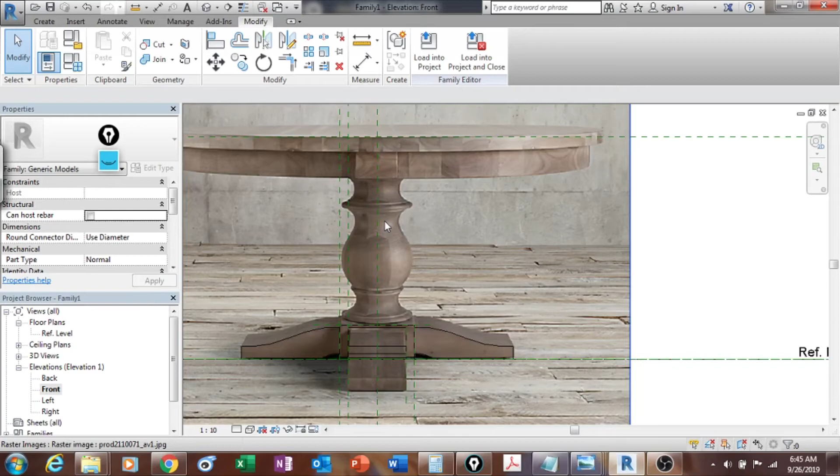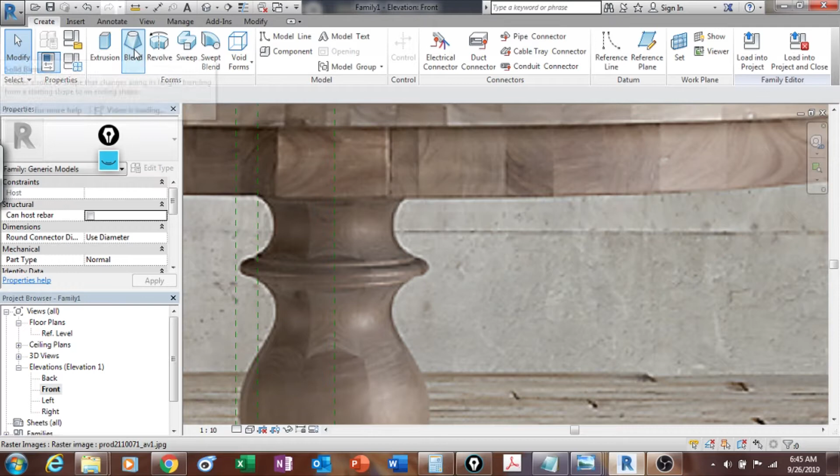Again, I'm not going to be very particular. I just want to get the shape. I'm going to go here to create. Extrusion is right here. Then I have a blend, and we talk about that in another tutorial, another example. And then you have a revolve right here.

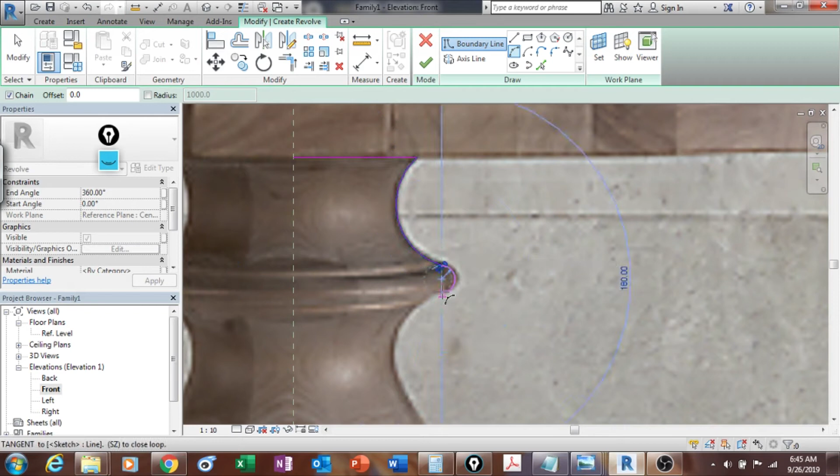Once you hit revolve, the first thing you need to do is define the boundaries right here. You see blue? Okay. So once you do that, again, you have your toolbox and you can start working. I'm going to start with a line right here, go all the way up to here, and change that into an arc. Another arc, another arc. Another arc.

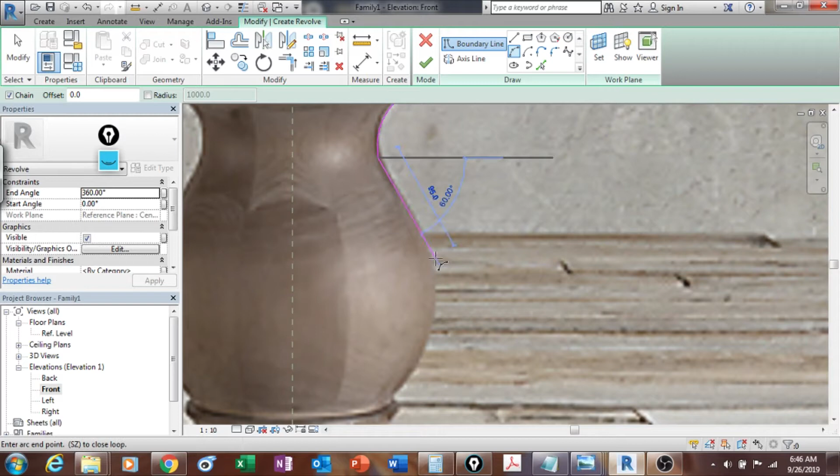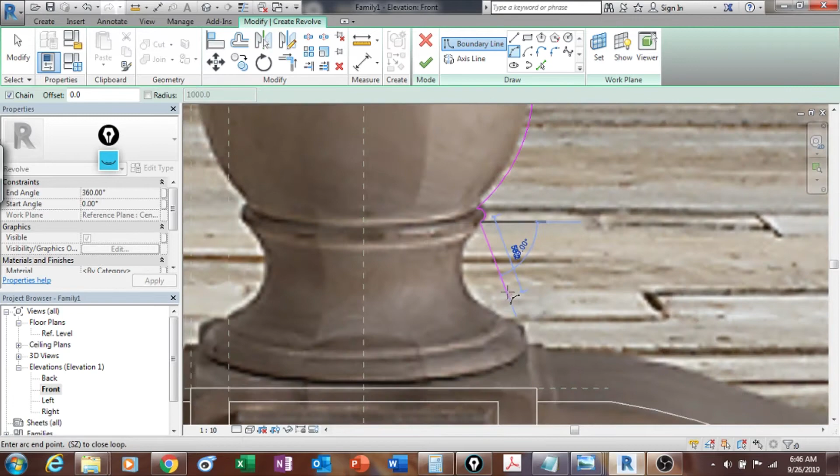I think that's gonna take this. It's probably not gonna be very nice, but anyway, it's okay. That, and I'm gonna make sure I finish right here. So as you can see, we're gonna have to do some editing in here, right? I'll make sure. Then I'll switch lines, make sure I close in here, and make sure I close in here.

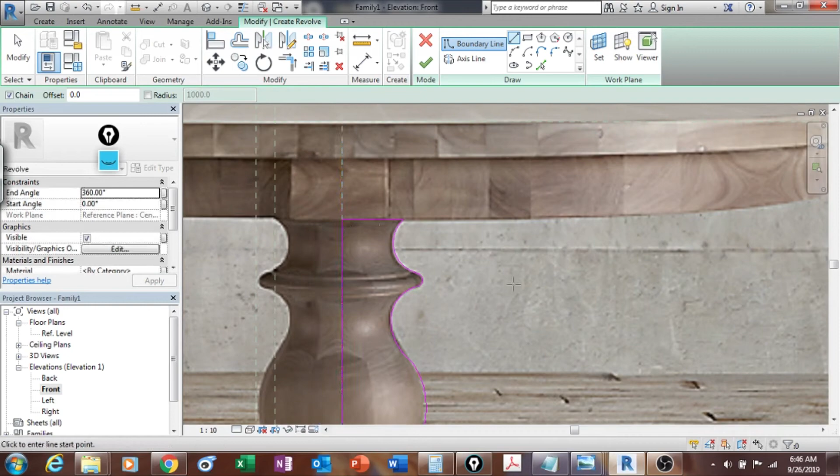Okay, so now what I have here is the actual, notice that here I have to correct my shape a little bit because I want to finish flat right here. Remember, this is a picture and the picture has some perspective to it, so you have to correct that as you go. We'll see what's happening. The good thing about this is that at any point you can go back and redo the profile.

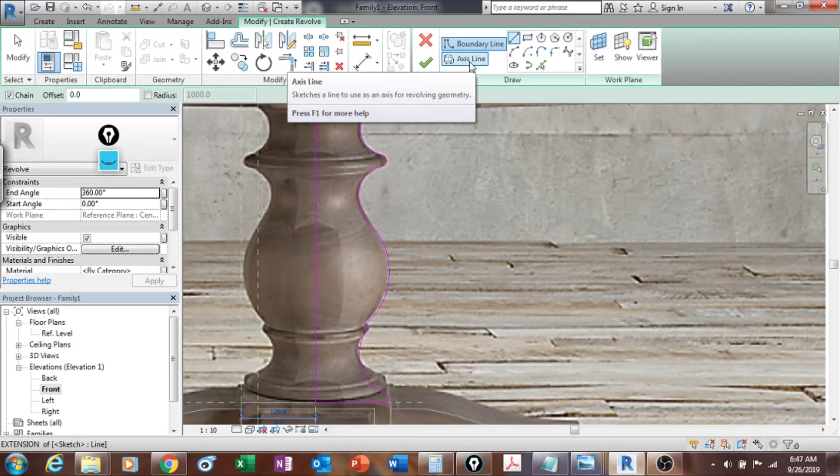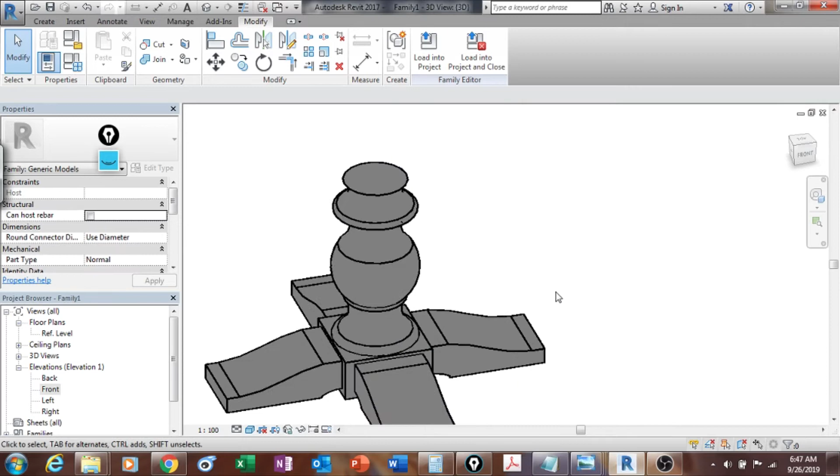Okay, so I'm gonna hit axis line, and for this one I'm gonna choose pick a line, and I'm gonna pick this, which is the center axis. Once I do that, I'm going to finish here. You cannot see here, but if you go to the 3D, you're right there. Not bad actually. And change this here line. Yeah, it's actually not bad at all.

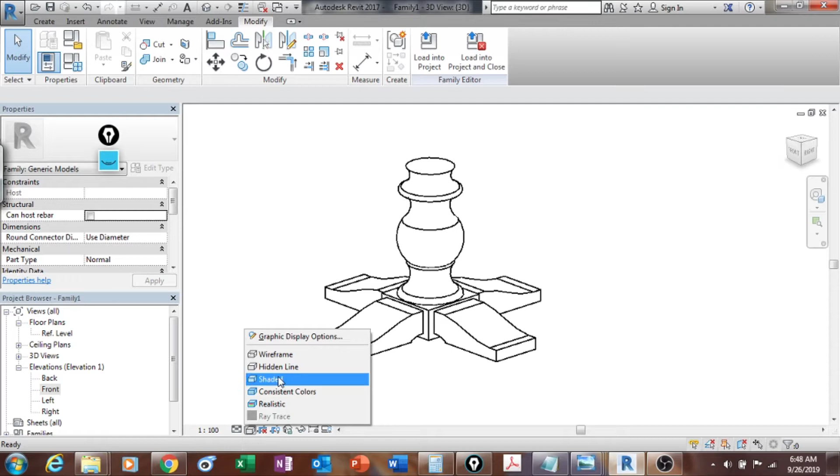Notice that here you don't have shadows like you will have on the actual project working environment. Okay, so let's go back here, shaded. Yeah, not bad, good. So let's go for the top. Now the top is going to be a different story. If this table comes in only one version, it will be the easiest thing in the world. You draw a circle, you extrude the circle to the top, and that's it. That's going to be the end of the story.

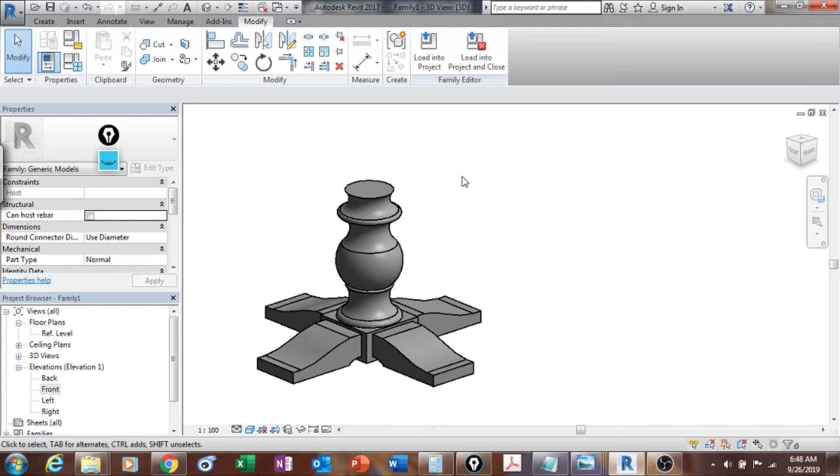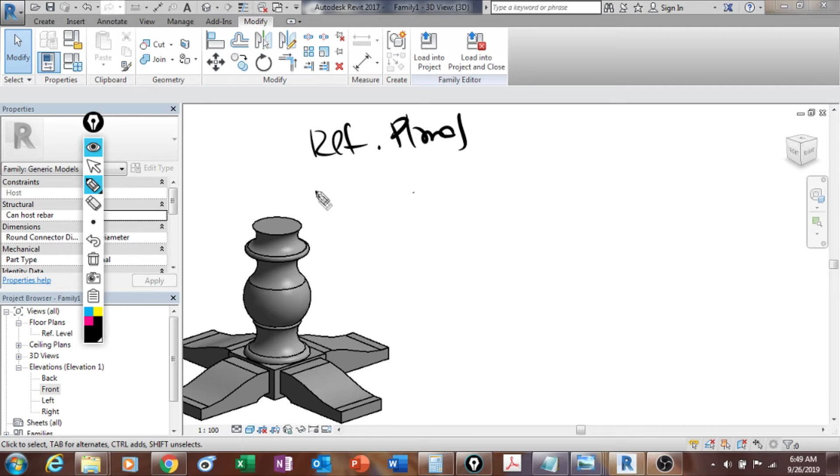But this is going to be a different story because we want this table to be able to produce 3 different versions of the same one. So right now we're going to start working with what we call parameters. At this point I want to do a little explanation about parameters. When we are talking about parameters, we're going to be talking about 3 things. Number 1 is reference planes. Number 2, parameters. And 3, the geometry.

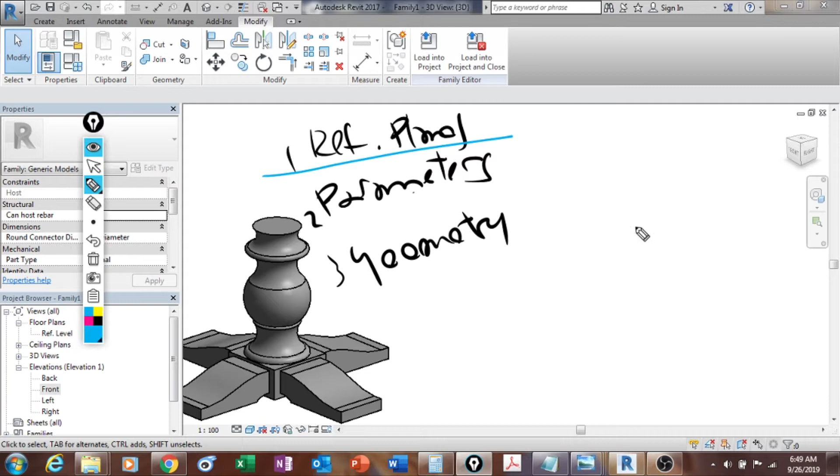And how is this going to go down? Well, the one thing we want to work with is our reference planes. Now, the reference planes are going to be the skeleton, the backbone of your family, of your component. Okay. Then we're gonna have the parameters. Now, what are the parameters? Well, the parameters are what control these reference planes. Okay. So when the parameter changes, the reference plane changes. So finally, what we're gonna have is the geometry.

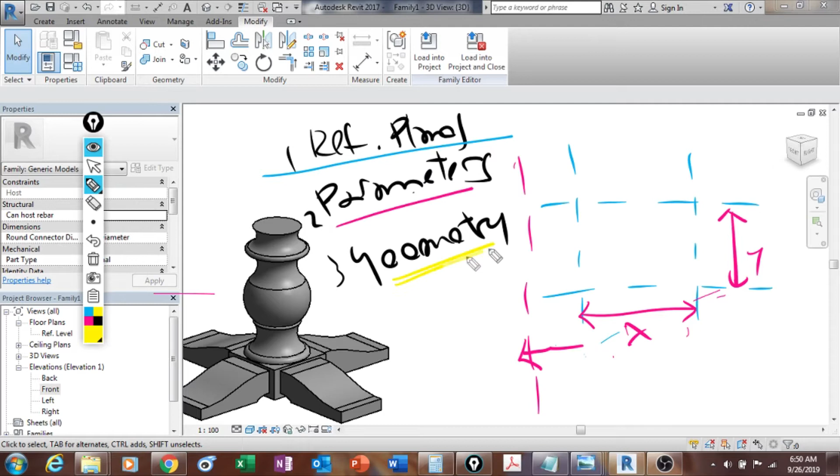Let's see if I find a nice color. Finally, we're gonna have the geometry. Once we have the reference planes and the parameters, what we're gonna have is the geometry, and this is gonna be very, very important. Our geometry needs to be locked to the reference planes. Okay, actually this goes here, sorry. This is very, very important. This goes here and this goes here.

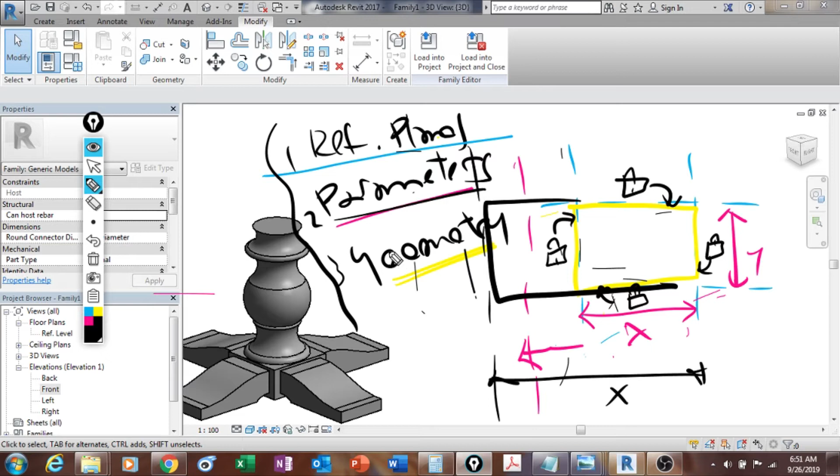Why is this important? Because once my parameter changes, my reference plane will change, and if my geometry is tied to my reference plane, the geometry also will change. So we need to think in terms of these three elements. Now it is very important that we understand this. So in our particular case right now, basically what we're going to have is a reference plane right here. That actually is not going to be a reference plane, but we'll talk about that later.

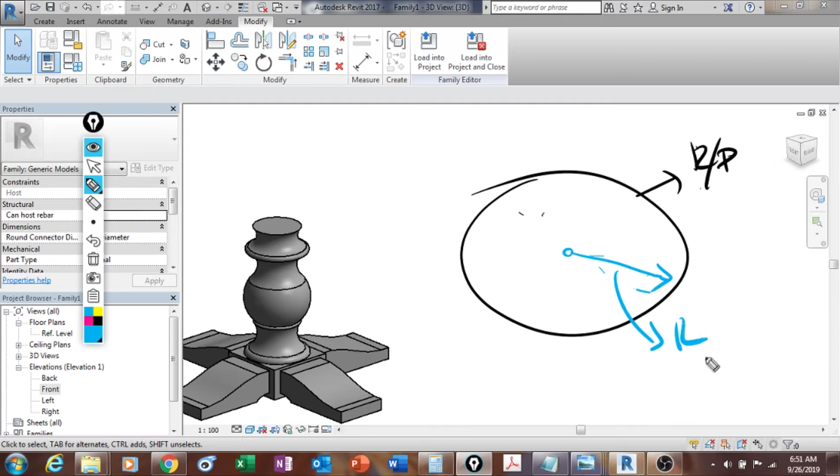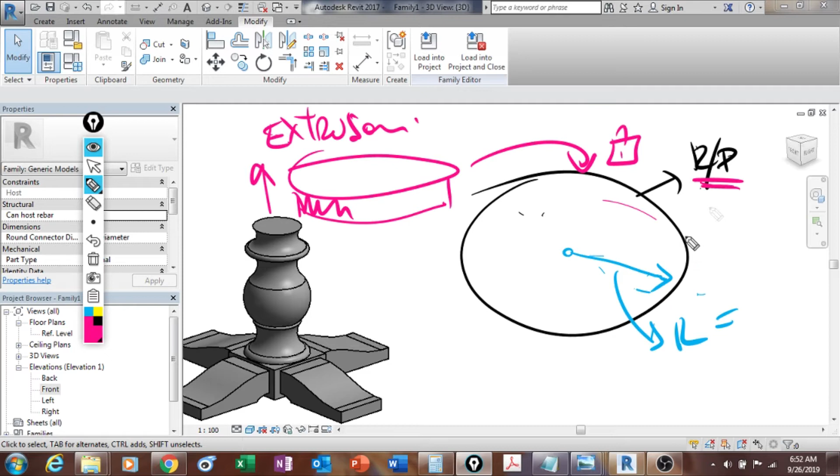Now, then we're going to have our parameter. Our parameter is going to be based on a radius. And then finally, what we're going to draw right here is a cylinder, which basically is an extrusion that is going to be tied to the reference plane in a way that when the radius changes, the reference plane changes and the actual geometry changes. So it's like a chain reaction, something like that.

It's like, I don't know, like a domino effect, if you want, in which the parameter controls the reference plane and the reference plane controls the geometry. Okay, this is a hierarchy system. It's the most important thing you have to understand, that there's a hierarchy system in which on top of the whole system is the actual parameter.

The parameter controls the reference plane and the reference plane controls the geometry. That's why it's so important, critical, that the actual geometry is tied to the reference plane, because by default Revit is not going to tie to it. You're going to have to do it yourself. So you've got to make sure that when you create the geometry, your geometry is actually tied to your reference plane. Okay, so let's see how that actually works.

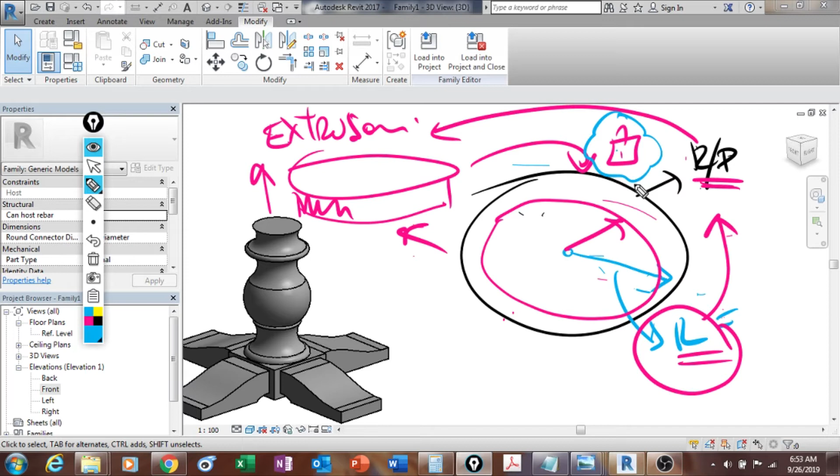So the one thing I need to do is create a reference plane for the top. Good. So let's do it. Now, I know I've been talking a lot about reference planes, but for this particular case, we're not going to use reference planes because reference planes are planes. We need a circle. So we're going to use something very similar to the reference plane, which is a reference line. For planes like this one, you can use a reference plane. But for other things like circles, you're going to have to use a reference line.

It's pretty much the only instance I can think of where you're not going to use reference planes, you're going to use a reference line. Anyway, it is in the same box, and they are very similar. There are very few differences between these two. One of the differences is that if you need a circle, you're going to have to go for reference lines because a reference plane cannot produce that. So let's go for this one.

Okay, so let me see. Let me go back to this thing. So the first is 48, right? So let's work for the 48. Let me see how much 48 is. Let's go here, 48 inches. So this is 120. Okay, 1200. That's what it's going to be. So the radius is 600, right?

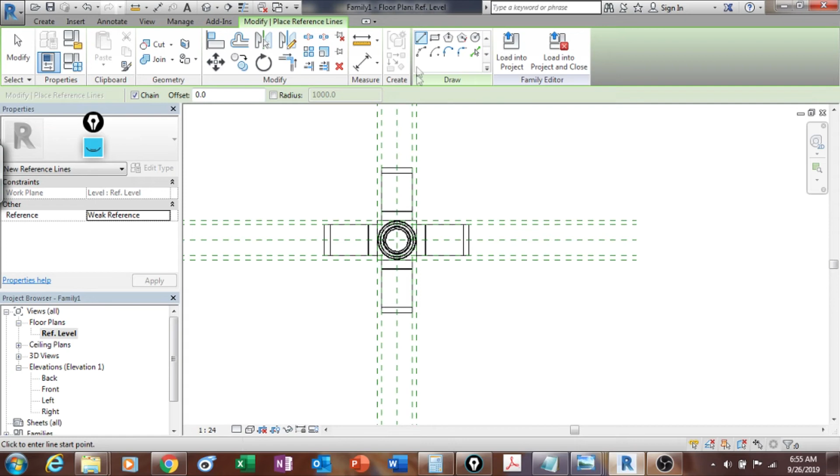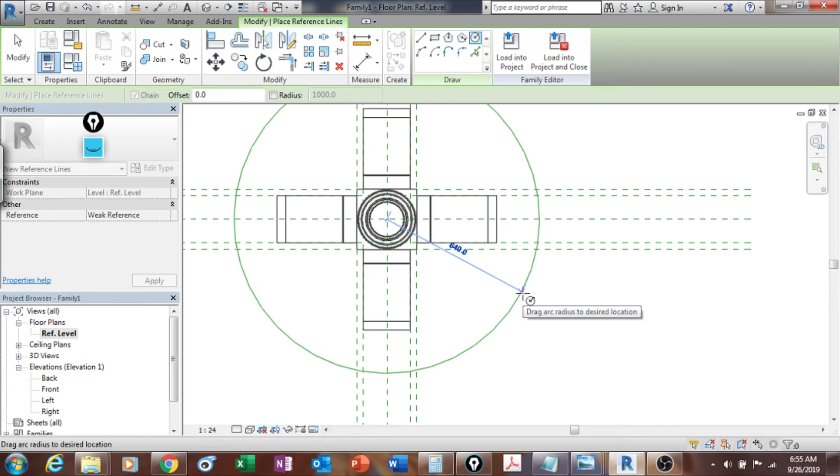Just the same way we create a reference plane, we're going to use this one instead. So create, same technique, reference line. Now on reference line, check this out, you have the opportunity to get a circle. With a reference plane, you have no chance. The only thing you can create are planes actually. So that's a bit of the explanation. So let's go here, reference line. We have the chance here to pick a circle. So it's just going to pick the center, and I want this to be 600. There. So that's my reference line.

Now the next thing I'm going to do is create my parameter, the parameter that is going to control this radius or diameter, depending how you want to see it. I think the radius is fine. So let's create a parameter. The one thing I'm going to do is create a permanent dimension. So create, the dimensions are here. I'm going to go for the radial dimension. So I'm going to pick this one. This is 600. It's a simple dimension, the one you can use in a project environment to indicate a radius. Nothing crazy about this.

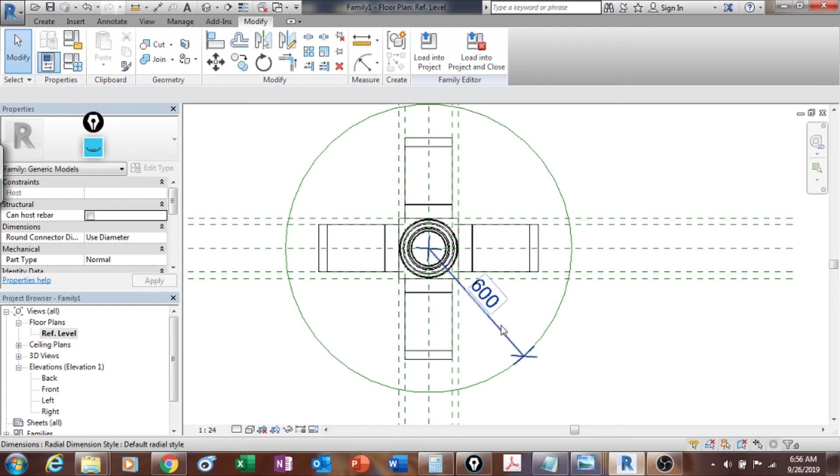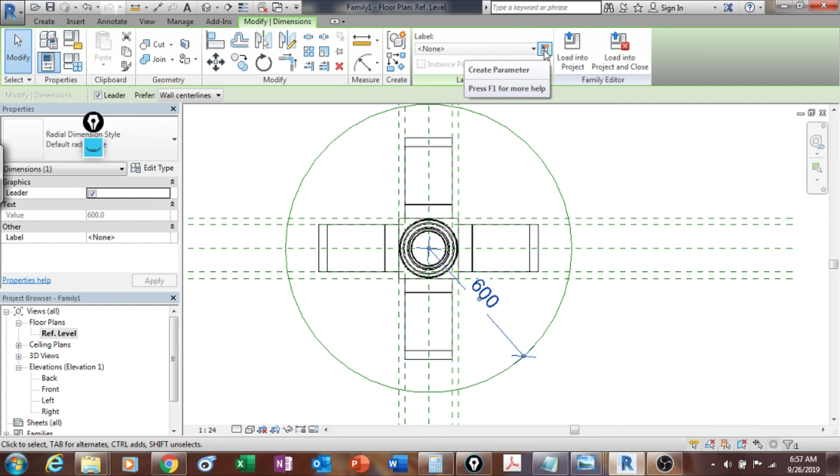Now I need you to pay attention here, because now I'm going to make a parameter out of this regular dimension. So I'm going to hit the dimension, and once I hit it, you're going to see this little box right here. When it says label, it says none. Basically, this is not a parameter, this is a dimension actually. So I'm going to go to this little box that says create parameter, to make a parameter out of this thing. Hit on it, and now we have this parameter dialog box.

Now, family parameter or shared parameter? Let's keep this logic. We are creating a family, so we want to keep this as a family parameter. Let's leave it like that. Name, I can call this R because it's a radius, but you can name it anything you want. Discipline, it is a common discipline. This is quite important: type or instance.

Now, in this particular case, I want to make this type because I'm going to have three types of table: 48, 60, and 72 inches. So there's going to be three types of table. For that reason, I wanted to make it a type. Good. So discipline common, it's going to be a length, and it's going to be dimension.

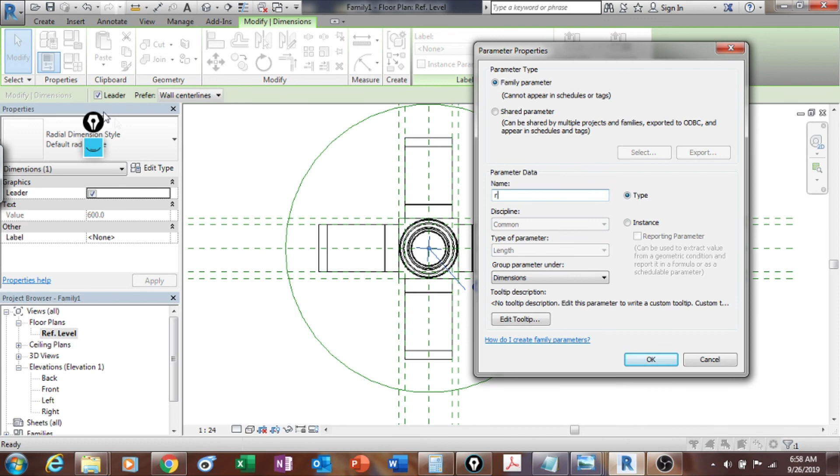Okay, now let me take a second to try to explain what the difference is between a type parameter and an instance parameter. In this particular case, we're going to go type. We're going to have three types of tables, right? 48, 60, and 72.